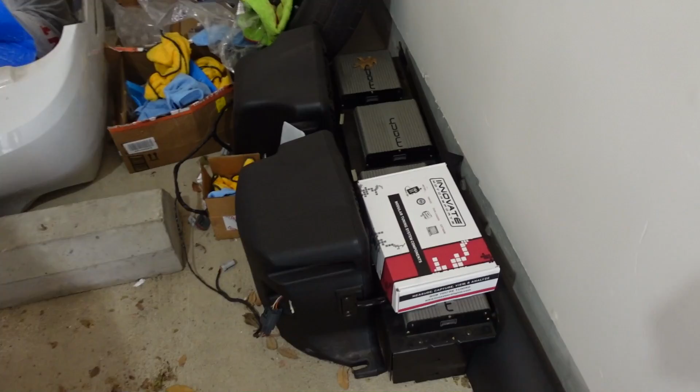Now what we're also going to be installing today is going to be this new Innovate gauge. This is going to be a pretty cool gauge because it's going to have the integrated air fuel ratio as well as the boost in there, so we can kind of monitor everything.

I'm thinking this car is probably going to make somewhere between like 15 and 17 pounds of boost on this new setup. It's a stock bottom end 2-valve. We're just going to go ahead and full send it because I have another motor being built right now, and we're just going to max things out.

I also have to swap the belt. This is going to be the belt for the 2.87 pulley. I got the pulley in here over as well. This is the old junk intercooler, so we're going to see what this car can do.

Alright, we are all gassed up, at least to the point where I'm happy with where it's at, because we all know how these stock GT tanks like to act.

You guys probably can't even hear me. Freeway frontage road towards US 59 North.

Alright, as I was saying, we are all gassed up, at least to the point where I am happy with where it is with the car. You know how these stock GT tanks like to act.

Alright, so we're back on my side of town. Hopefully the wind noise isn't too bad. It's just my luck, whenever I try to record a video outside the wind noise is crazy.

But holy shit, I can guarantee you none of you guys, including myself, thought the car was gonna put down the numbers it did. Now, the numbers it put down with the 3.12 pulley was pathetic. I didn't even think it was under 400 wheel horsepower. Realistically, I thought what it made with the 287 pulley is what the car was making with the 3.12, but lo and behold, the car was making like 380 wheel horsepower, which is pathetic. And honestly, it didn't feel like that. I literally ran the car all 2K week at 380 wheel horsepower and didn't even know. That's actually kind of hilarious.

And I did a pull in the car with the setup right now. Unfortunately, my GoPro died, but it does feel like it should, like how the car did with the 410s, but with the power just kind of equally distributed. I'm able to ride second, third, and fourth, so I'm gonna go ahead and get some draggy numbers, the 60 to 130 time, which is not gonna be anything crazy because obviously the car isn't turned up all the way. There's a lot left in it. I know a lot of people like to say that, but there's literally a lot left in this car. We're only running about 17.5 degrees of timing in here.

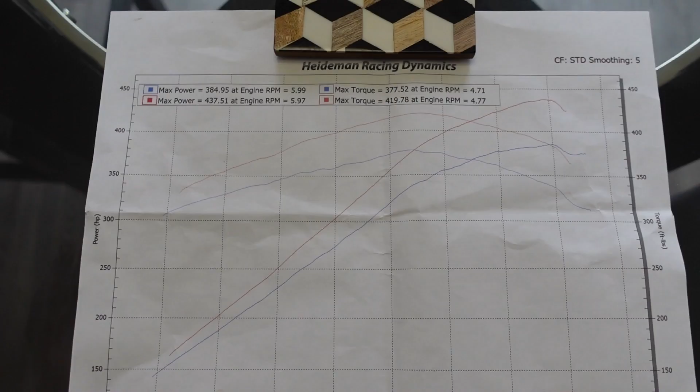I'm going to go ahead and show you guys the graphs right now so you can see what I'm talking about. Alright, so I decided to jump back into the house because there's a bunch of wind noise and I want you to be able to hear me clearly so I can explain everything, and also I want you guys to be able to see the dyno graph very easily. Now, this was done on a Dynojet, and it is the STD Smoothing 5.

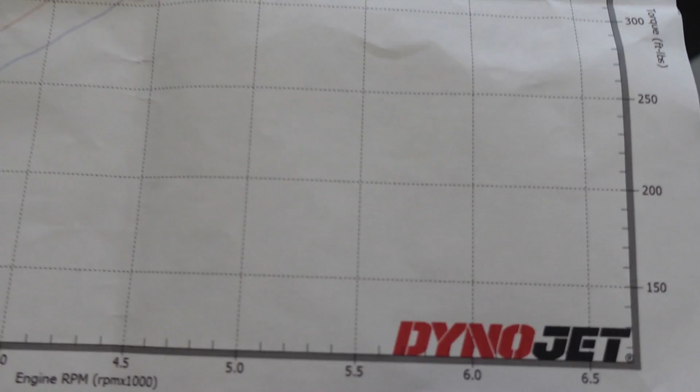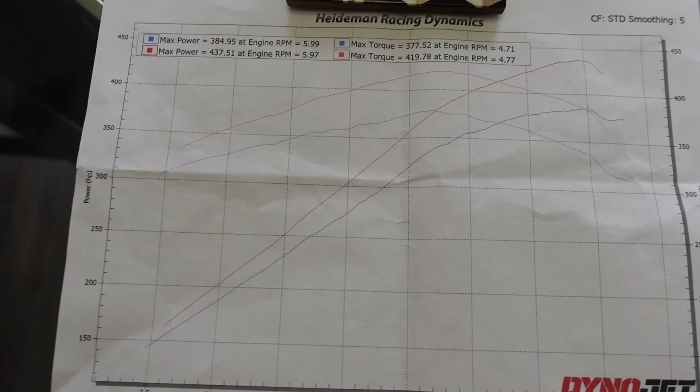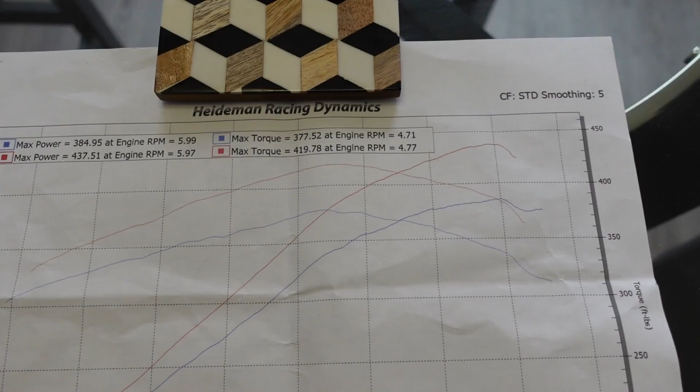The STD Smoothing 5 are the numbers the car makes when you literally calibrate it to the dyno, run it, and those are the numbers the car is putting down currently. This was an 85-degree day at the dyno. The car previously made 450 wheel horsepower on a 60-degree day, on a Mustang dyno of some sort - all I know is it said Mustang dyno on it. I'm not sure what dyno that was, but these are the numbers the car made on the Dynojet. Now all we did today was literally swap over from the 3.12 pulley to the 2.87.

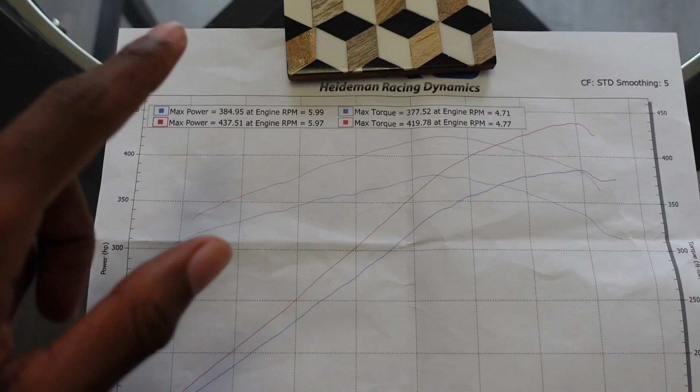That's it. We did not retune the car. There was no tuning done.

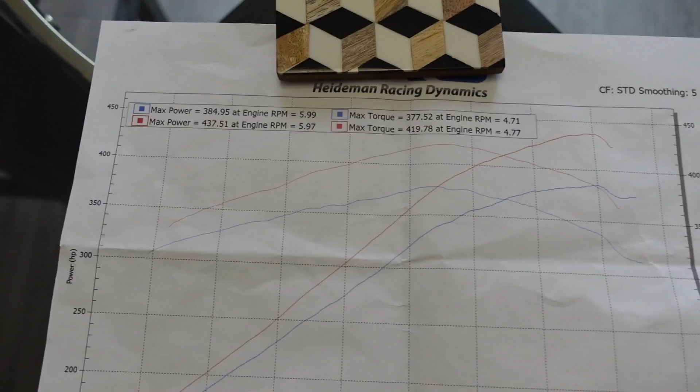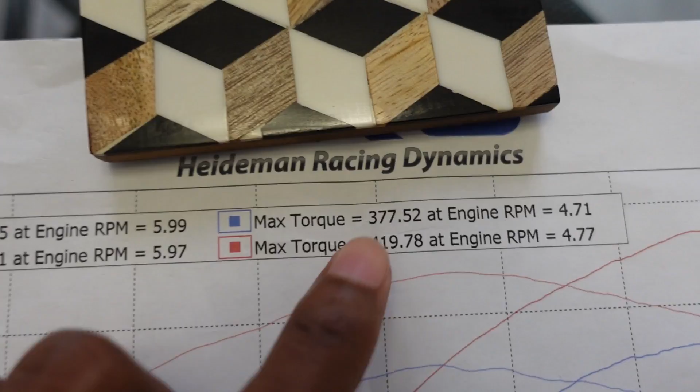All it was literally the car strapped down in the dyno, and we let it roll, and this is what happened. So as you guys can see here, with the 3.12 pulley, the car made 384 wheel horsepower and 377 foot-pounds of torque, which honestly is incredibly low.

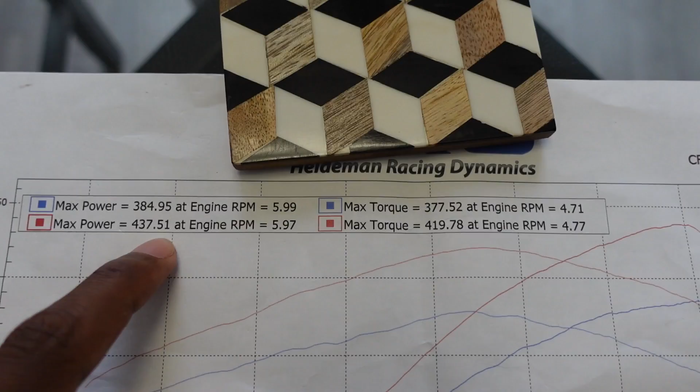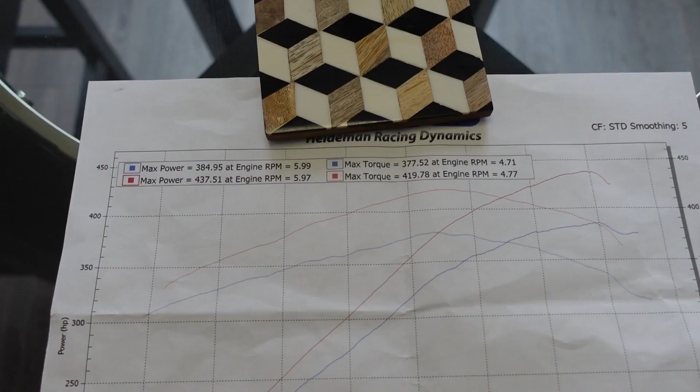I honestly thought the car was going to make the power it made with the 2.87 with the 3.12 pulley. So I was really surprised when I saw 384 wheel horsepower, because the car definitely did not feel like it was that slow. Some people are going to say 384, you should be happy with it - it's a 2-valve, I get that, but when you're coming from 450 wheel horsepower, that's a huge drop. So I was very surprised that a 3.12 pulley, even with that Treadstone intercooler, really didn't make sense to me.

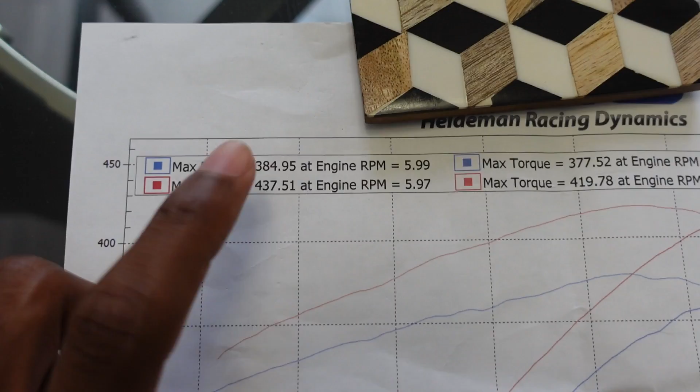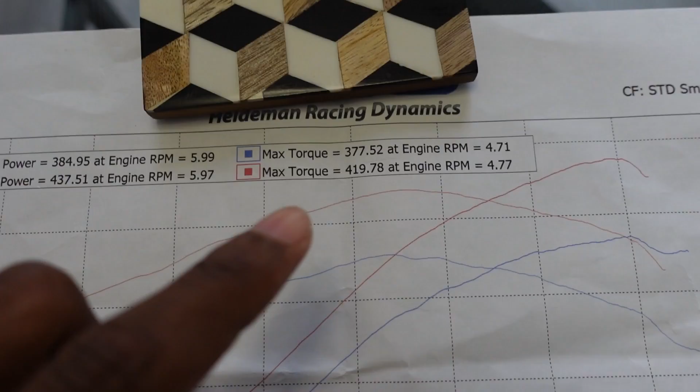Now, if we went ahead and put the 2.87 pulley on the car, it made 437 wheel horsepower and 420 foot-pounds of torque. Previously we had the 410 gears in the car, and the car did not have the drag radials on it. I had the car on the dyno with the radials, so obviously the radials are going to take away a little bit of horsepower, and I do believe having the 410 gears does alter the torque slightly. So, 437, 420, I'm just going to take the numbers. Again, this is not with a tune.

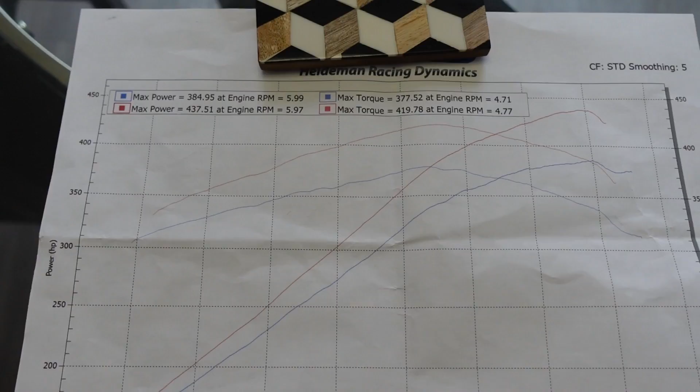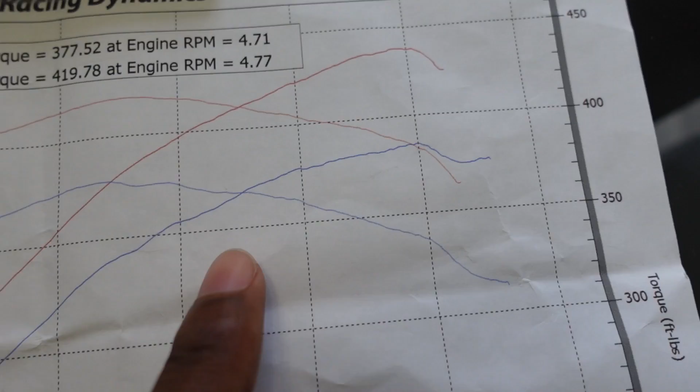This is literally just me swapping pulleys and letting the car rip on the rollers, and this is what it is. As you guys can see here, the blue line is the 3.12 inch pulley, and the car is pretty much linear. The power band is smooth, and there really isn't any drop off. We spun this car up to 6,200 RPMs, didn't go past that because it's a stock head, stock cams - there's absolutely no reason to do that, and the car isn't going to make any power past 6K anyway.

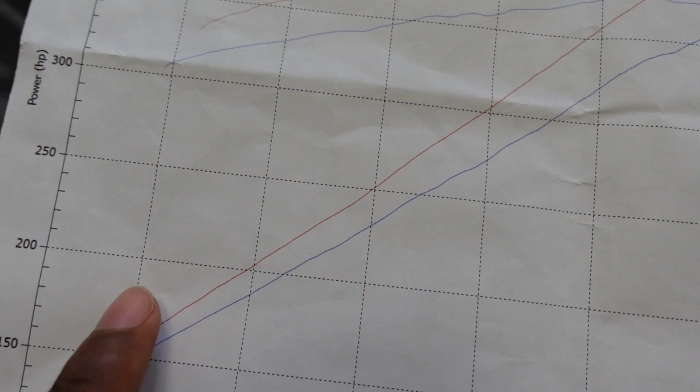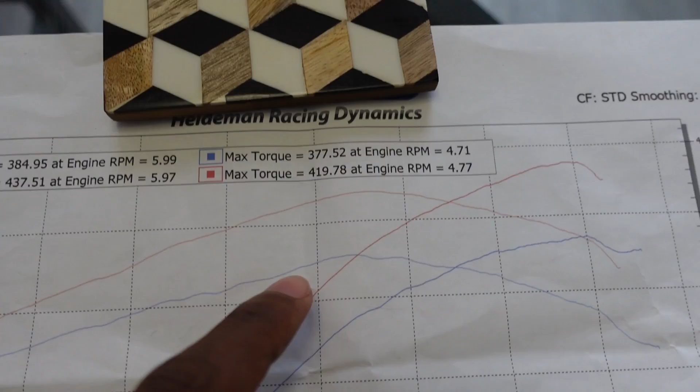Now the red line is the 2.87 pulley, and you're going to really see a huge difference once we get around to 4,500 RPMs. This is where the Vortech V1 TI trim is really going to shine. You can see the massive jump in power difference between the two pulleys. You're going to really have to spin these Vortech V1 race blowers a lot faster than the regular Vortech V3 SI.

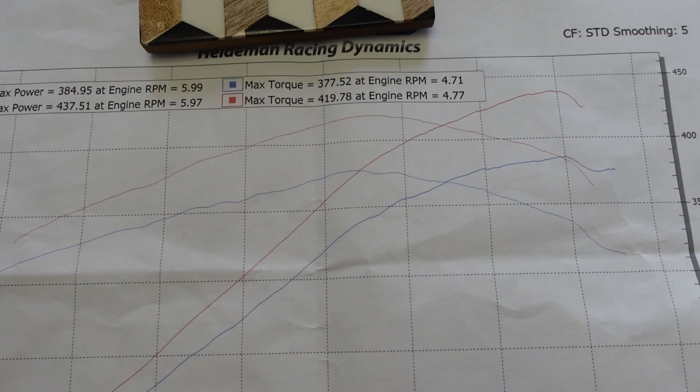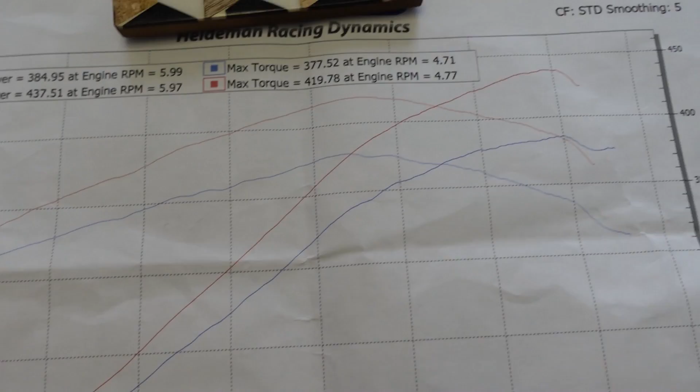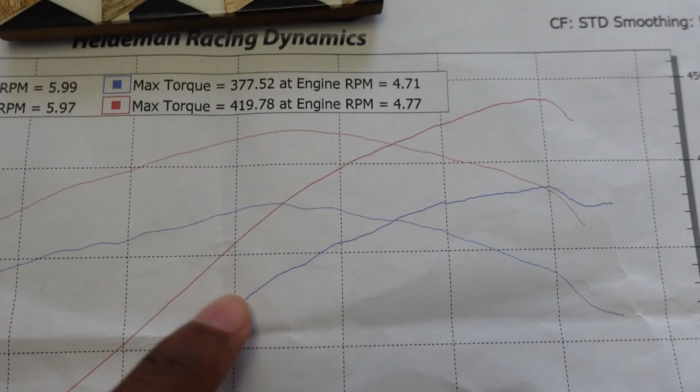Now I do believe if I had the V3 SI trim on this car with the 2.87, we would have seen a lot more power, because it's going to be utilizing the blower more efficiently with the heads and cams combo I have, and the power isn't going to be all made around 4,500 RPM. So this is a huge jump. Once I do go ahead and get the new motor into the car with the heads cams combo, this is going to be honestly unbelievably different than what we're seeing right now, just based off of how this blower is reacting.

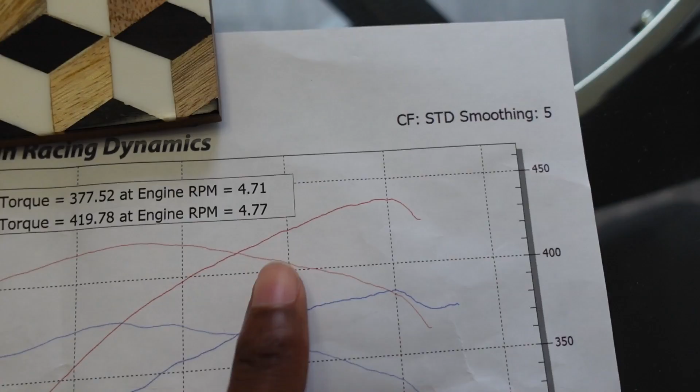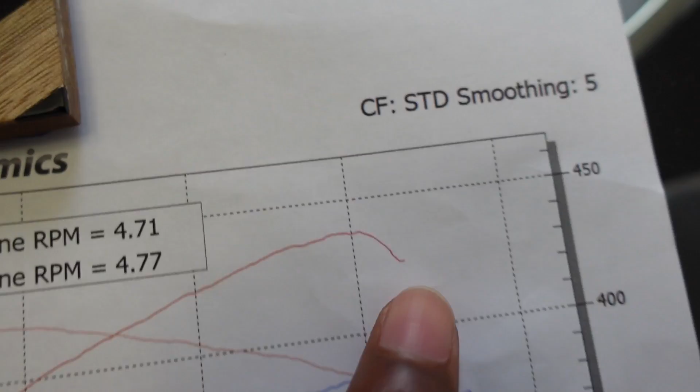Now you guys can also see here, it's just a ridiculous climb, and then there's a small dip around 5,900 - this is kind of where the power just kind of tapers off. But you can see here, it goes up a little bit and then we shut it down. So there's a lot left in this car.

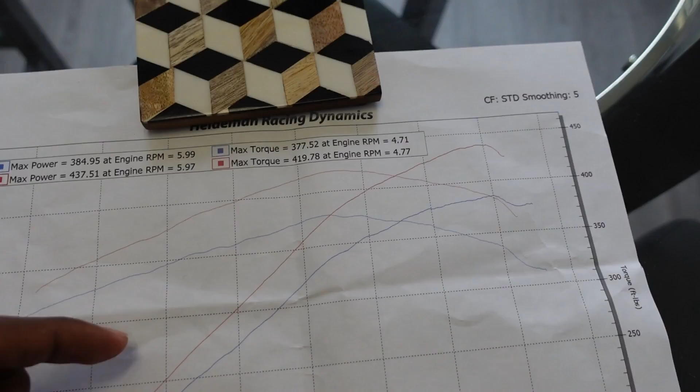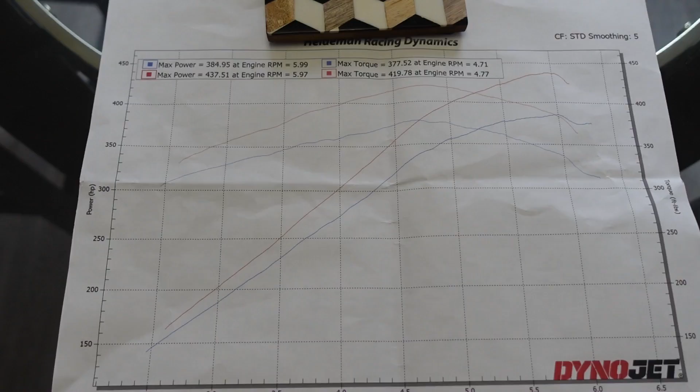The blower, in my personal opinion, and from what we discussed, is technically too big for the stock bottom end. Well, not too big, but it would utilize a heads/cam setup with this car into E85 a lot better than the stock head, stock cams with 93. So if you guys have a stock motor 2-valve and you're not looking to push a lot of power, definitely just go ahead and get a V3 SI head unit or a V2 SI head unit and pulley it down, then let it rip.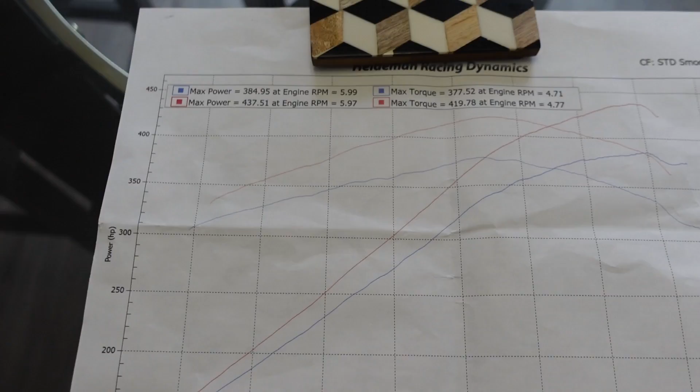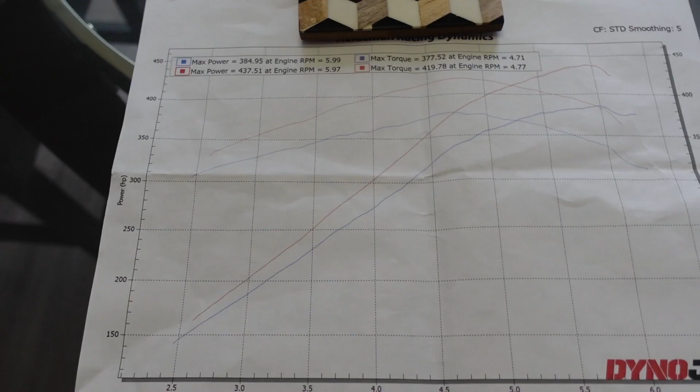437, 420, 85-degree day on the dyno. We're gonna go ahead and see what it runs at night. Obviously a 25-degree difference, 60 versus 85, that's gonna be noticeable, but not a huge difference. Definitely gonna go ahead and run this car with the Dragy, see what it puts down, and go from there.

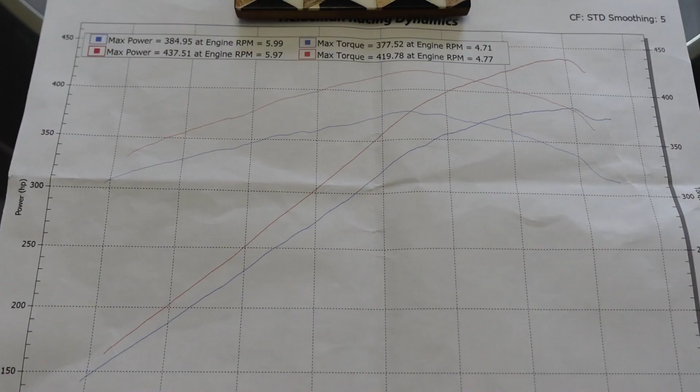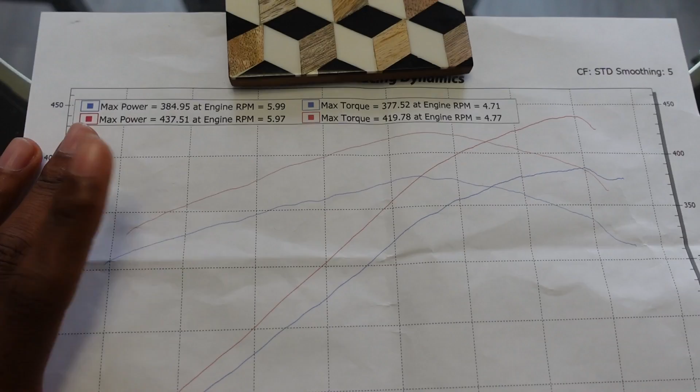This is the last time I'm gonna be dyno tuning this car. Not really dyno tuning, this is the last time that I'm gonna have the car on the rollers with this setup. I'm not putting this car back on the rollers until the new motor is in the car and we can really put down some power.

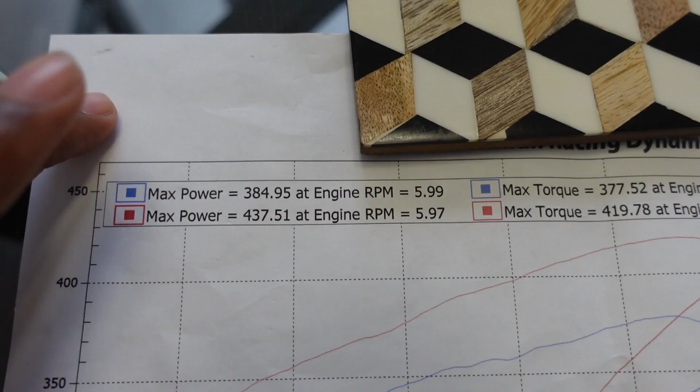This is drastic, like a 50 wheel horsepower difference from quite literally 2 pounds of boost difference. The 2.87 pulley put down 13.5 pounds of boost, and the 3.12 pulley put down 11.5 pounds of boost, and that was 50 wheel horsepower, 17.5 degrees of timing. That's actually a lot.

I can't believe it made 384. I know you guys can't.

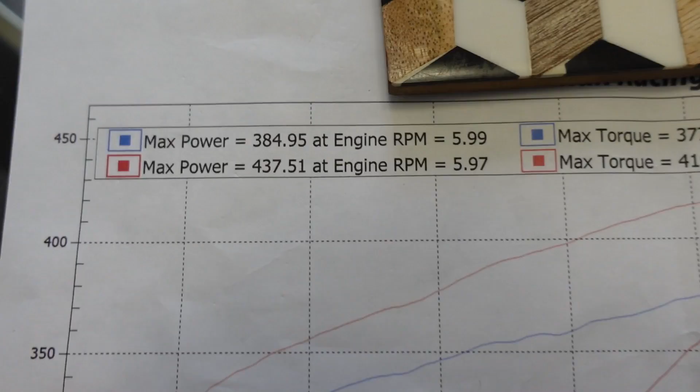Damn. But let me know, man, what you guys think. I know a lot of you guys were expecting this car to make certain numbers, and some of you guys actually were spot on - a lot of you guys said between 430 and 450. Personally, I was expecting to send this thing to the moon and make like 480 wheel horsepower, but it's a 2-valve, you don't know what you're gonna get with the stock 2-valve.

I mean, people make numbers that don't make sense. People make numbers like this. So the only thing we can do now is literally just get the built motor in there and really go ahead and let her rip with some E85.